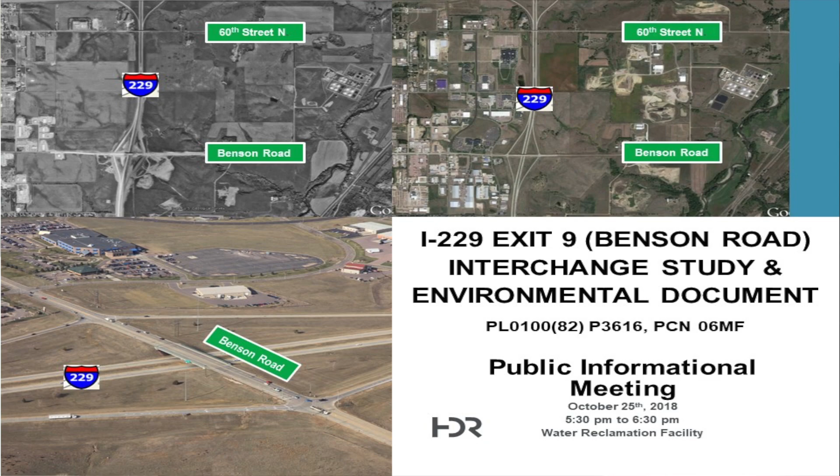Tonight we're going to talk about a project that we kicked off early 2018 where we're doing an interchange study, with hopes of having a document that we turn into federal highway in the near future. And while we're doing that, we're also doing an environmental document. These are kind of the first steps in preparing for construction.

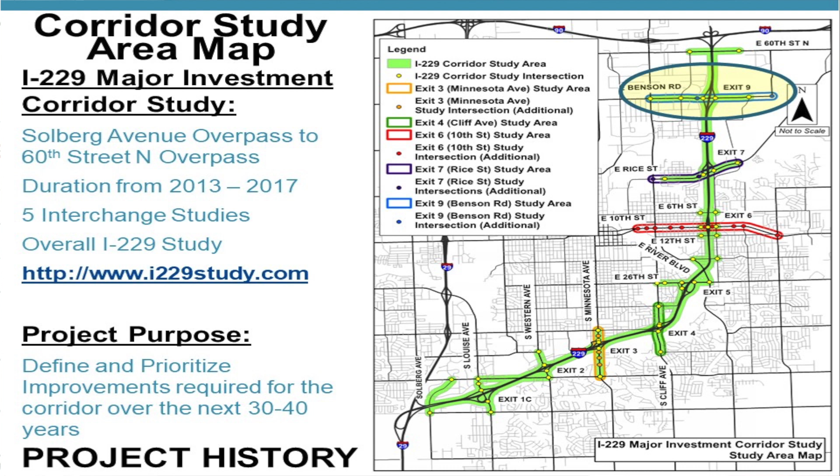We had a lot of different things we were looking at as part of the study. We also looked at different ITS applications, or for most people, that's things like digital signs on the corridor, message boards. We looked at variable speed limits, all the things we might anticipate happening on the interstate corridor 229 over the next 30 to 40 years. That was a very large study. I think we held probably 50 different public involvement events between small group meetings, public meetings, and stakeholder meetings.

Eventually, last year, we summed up the project. We defined the priorities moving forward, and hence this is why the Benson Road project is being worked on now.

For Benson Road specifically, at I-229, the limits of the study go from Cliff Avenue over to Sycamore Avenue, consistent with the corridor study. Now, later in the presentation we'll talk about the actual limits of construction, which will be a little shorter than that. Right now, we're identifying construction from about Lewis, just a hair west of Lewis, over to somewhere between Bahnson or Hall Avenue, depending on what we find out with development.

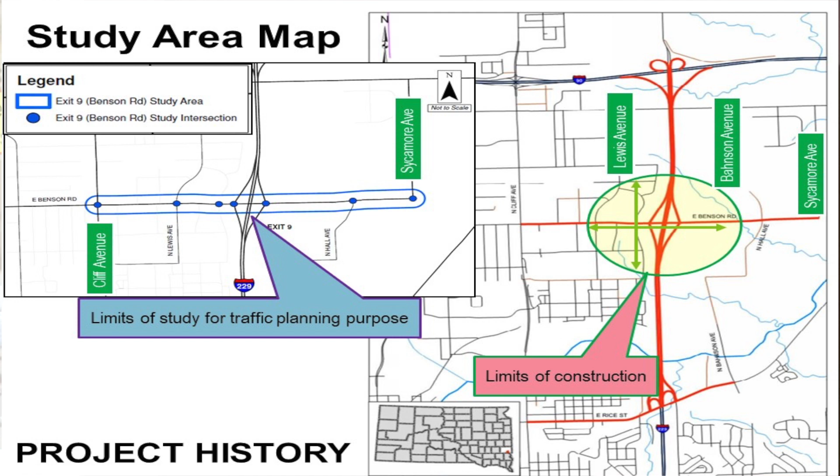Some of the things we learned during the corridor study that are relevant to carry into our current study: as we start at Cliff Avenue, this was a location where our capacity was at level of service D, which is really just a grading system for how traffic works. That's at the higher threshold of where we want to be. If we get any lower than that, into an E or F range, we have to do some capacity improvements.

One thing that kind of resonated from that study was some of the crashes we were experiencing at that intersection. So at some point when we do improvements there, we'll have to look at those crashes again and provide some mitigation strategies.

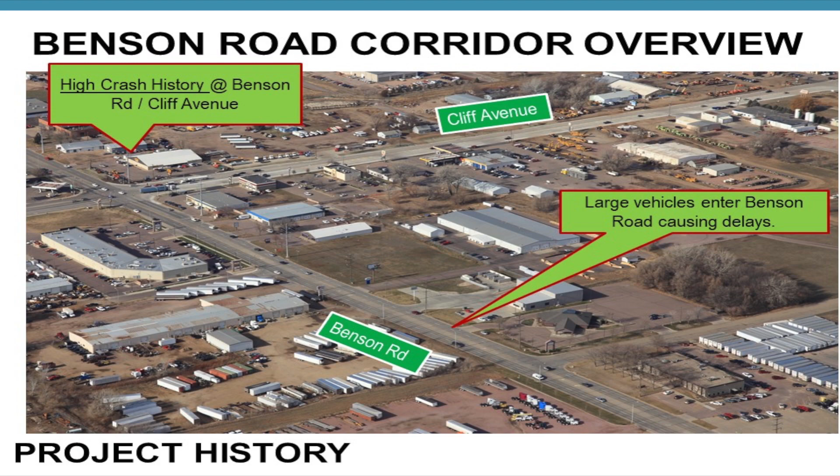A lot of the landowners, and I talked to a few gentlemen here tonight, talked about the larger vehicles on Benson Road. We have a lot of intersections out there that it's hard for trucks to make the turning movements, and they're turning over existing sidewalks. They're also finding it very difficult to even get out onto the corridor. If you're a commuter out here during the PM or AM peak hour, you get these long stretches of continuous traffic, and it's very difficult for a vehicle that takes a little longer to get on and off the corridor.

As we move over into the area between Lewis and Potsdam, Lewis Avenue serves a large employee area. A lot of vehicles come off the interstate going north on Lewis or north on Potsdam in the morning, and they're doing the opposite at night, coming back onto Benson to get onto Interstate 229. So we experience a fairly good amount of congestion at Lewis in the PM hour, more so than the AM hour. Potsdam is a little different.

At Potsdam, that's a location that doesn't have a signal, so in the morning it's an easy right turn to make to get to your area of business. But in the evening, we have about 200 to 300 folks trying to turn left back onto Benson Road to get on Interstate 229. If you drive out here, most of the time traffic is queued up in that outside lane, so there aren't really any gaps. We've got to address what to do with that so we can mitigate any long-term safety and crash problems.

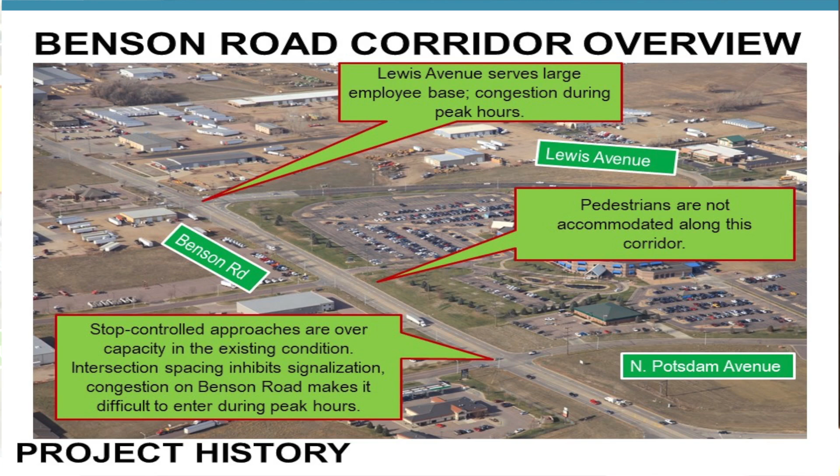One other thing we noticed, commented on during the corridor study, was pedestrians. Over the last 2 years we've implemented some sidewalk out there, but we don't really have a thoroughfare for folks to be walking. The sidewalk is here and there, and in these large employee areas we're seeing more desire for folks to have sidewalk to walk at lunch and do different things. We certainly want to carry that into this study.

At the interchange itself, this is unique. We have land use pretty much built out on the west side of the interchange, but on the east side we have very little land use developed so far. When we look at traffic capacity at the west interchange terminal, we've been watching it closely over the last 10 to 12 years. We haven't implemented a signal system, but we're watching to see when that would need to happen, and the capacity is starting to get right at the limit where we'll have to do something.

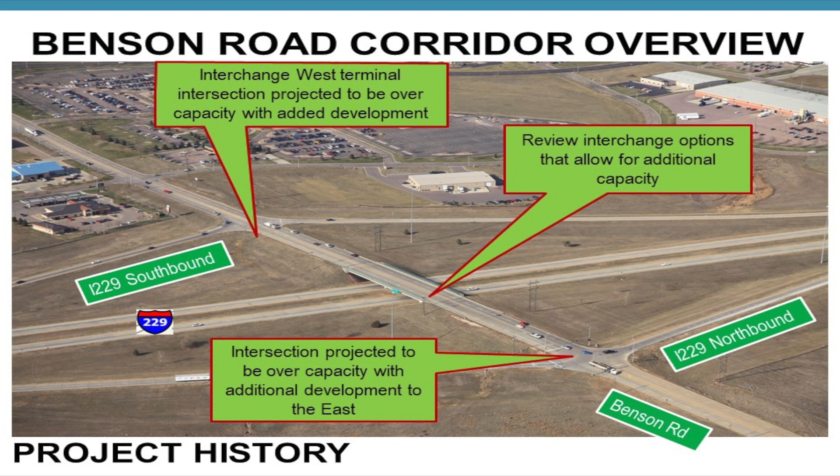At the terminal on the other side, the east terminal, right now we have about 1,600 vehicles turning left in the morning. We're pretty much giving all of the signal time to that movement because we don't really have much through traffic there. Our concern is that as development takes place to the east and we have to allot more time for that, we're going to have a lot more congestion than we already do.

If you've worked in this area a long time, we used to have the interchange ramp as a single lane, and then the DOT made it into a 2-lane ramp. That really helped separate the traffic and get more traffic through here. Now we're looking ahead for that next amount of traffic to come through, and to do that we need to look at different interchange options, which we'll get to later in the presentation.

These are our big drivers when it comes to operations in this area. In the morning, today's count shows 1,610 vehicles taking that left turn, folks going to work. That's a big number. If you look at I-229 at 41st Street, probably one of the other larger interchanges in Sioux Falls, we've seen numbers anywhere from 1,200 to 1,400 in that area. So by far, this interchange sees the largest left-turning volume in the city of Sioux Falls. What we typically look at is what happens in the opposite peak hour of the day, so the blue would represent the PM peak hour.

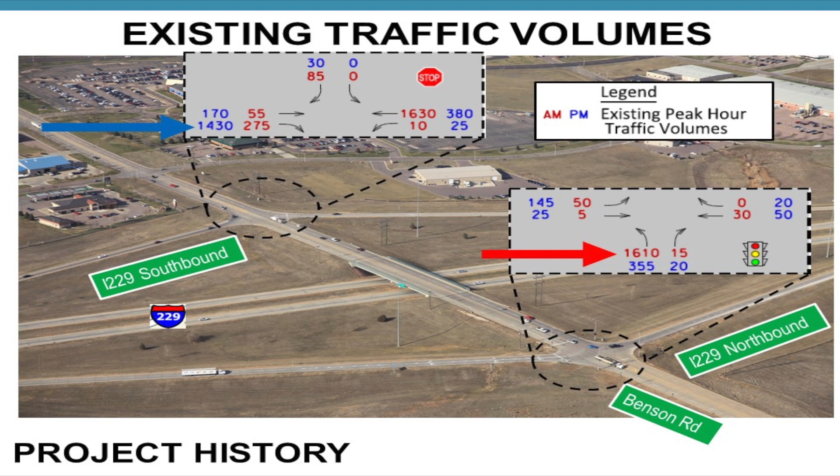We have about 90% of those people we see in the morning coming back trying to get onto I-229 to go back southbound, so those two numbers are very large. A standard ramp in the city of Sioux Falls, probably in the state, is anywhere from 600 to 1,000, maybe 1,200 vehicles. We're seeing a very large volume out here because we have large employers, and we need to service those industries.

As we get to the east side, this is an area with very little development that took place. On the south side, we're starting to see some development closer to Rice Street, but development plans are being looked at and talked about. We've got a lot of undeveloped land that's probably pretty prime for development. So in the not too distant future, we are going to see volumes generated from here, and we need to figure out what to do with them.

Another key component to looking at the east side is really the connection between Benson Road and 60th Street North. Bahnson Avenue is an area they've identified. This road was going to go in a few years ago; some grant funding had fallen through, but it won't be too long, and that roadway will be another conveyance over to Benson Road, sharing traffic volumes between those corridors.

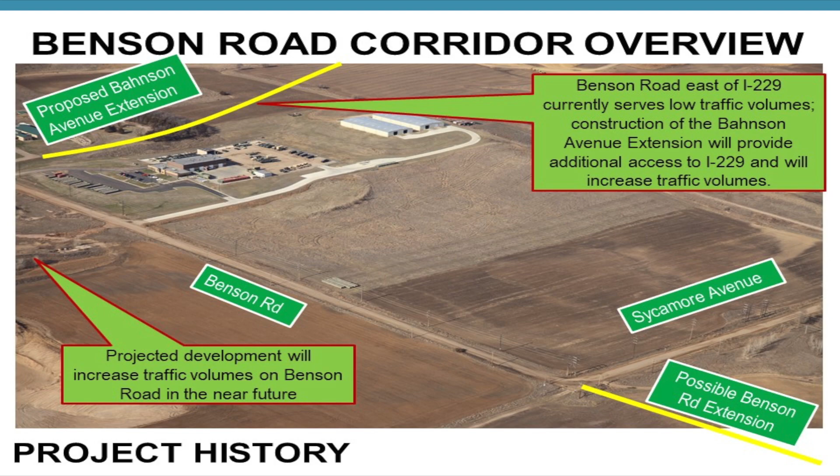Looking down here in the corner, this is even maybe a little further out in the future, the extension of Benson Road. You can look at the extension to serve additional land on the east side of the river, and the potential of Sycamore Avenue to go all the way over to Rice Street. All of these things were considered when we looked at future traffic volumes and what the corridor needed to look like on the east side of I-229.

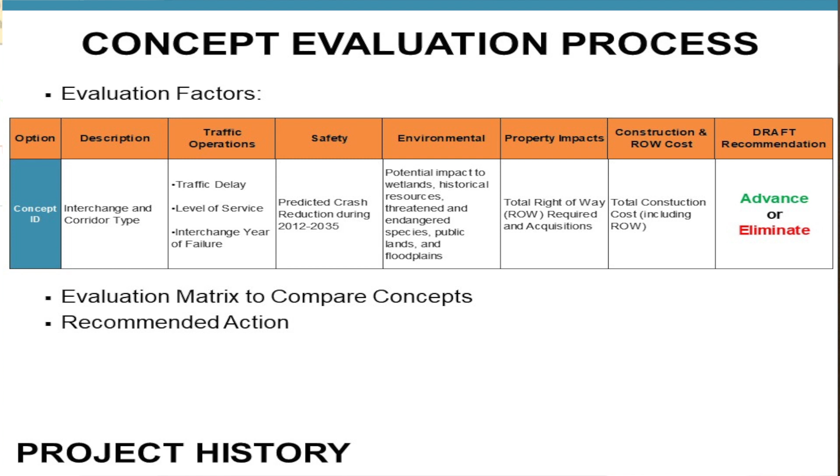All of that was done during the corridor study. We went through a higher level concept evaluation process. We looked at operations, traffic operations, and safety - how does the interchange work now, and if we generated a new option, how would that interchange work in the future? We looked at a high level on environmental impacts, cultural concerns, wetlands, streams, floodplains, and property impacts - does one interchange option need a lot of property from adjacent landowners or developers, or don't we need any?

That really gets into the construction and right-of-way cost. We have options here that range anywhere from probably 20 to 40 million, depending on what we're doing. We're not going to explicitly give you that information and show you which one is more expensive - we really want you to comment on the different options so we can have that takeaway from tonight.

With the corridor study, we generated a variety of options, went through them, and either advanced them for use in the current study we're working on, or eliminated them at that time. There was really no need to go back now and reinvest time into those options - we already screened them out. So we carried 3 options forward in the corridor study.

We'll go through these, and remember our key things: traffic volumes in the morning, 1,600 vehicles wanting to go this direction, coming up to the signal and taking a left. In the evening, we got over 1,400 that want to get back on. So that's kind of the driver in what we were looking at for interchange options.

Benson 1A from the corridor study looked at bringing a dual lane off-ramp off of I-229. Folks that want to go eastbound would follow the ramp up to the intersection and go east. The folks that wanted to go to the west side of the interchange would simply take the loop ramp, a 2-lane loop ramp. When they come up to Benson Road, they would not go through a signal - this would be a free flow movement. All of those vehicles that have to stop at the signal now under this option would not have to stop, which would certainly be beneficial. A lot of folks indicated that they really like not having to sit there and go through a signal.

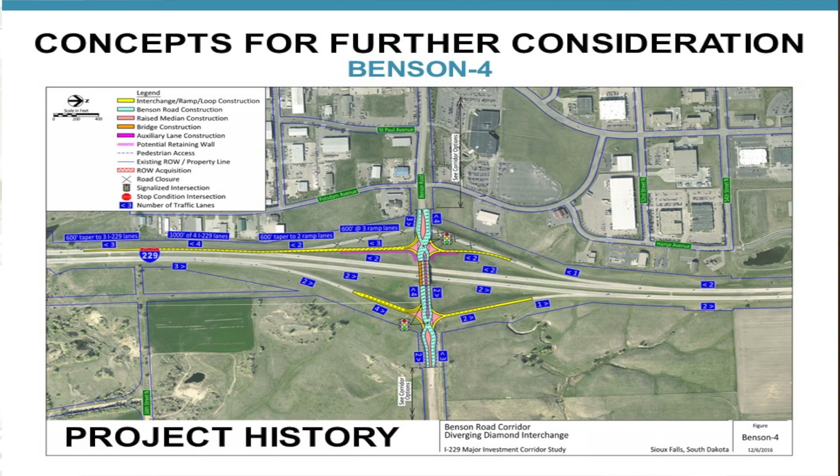We have traffic running east, traffic running west, folks coming out here that want to take a left and go north, and folks coming onto the ramp that want to take a left. Everybody has their own signal, they get a left turn arrow, and we've got to give all those people a certain amount of time. We want to take all those movements out if we can to really allow that ramp traffic to enter much more efficiently. I have some videos that will go over this, to make it clearer in your head what it looks like.

For the west side of Benson Road, we spent a lot of time on this in the corridor study. When we look at those future volumes, we look like we need a 6-lane roadway. Right now we just have 2 lanes in each direction. With a center turn lane, we would go to 3 lanes in each direction to manage that flow. Considering we're looking to the year 2045, that's more traffic than we're seeing out there today. So this is kind of a unique design - we'd have 4 lanes across the bridge.

We'd allow for 1 lane to exit at Potsdam, 1 would exit at Lewis, and then we'd carry 2 lanes over to Cliff Avenue. This design really sets up well for the type of traffic we're seeing at the interchange.

As we come down in the PM hour, we have to make some striping improvements to Lewis Avenue. Right now we're lucky there's enough width out there to lengthen those dual left turn lanes. We're going to have to make some improvements on Lewis on the south end. We'll actually start the 3rd lane a little bit on the west side of Lewis, and then we'll have 3 lanes all the way over to the interstate.

So these are all the things. One thing to note, if you're a landowner out in this area, when we go to 6 lanes, we go with an raised median section as an access management treatment. It gets awful wide for vehicles to turn across all of those lanes.

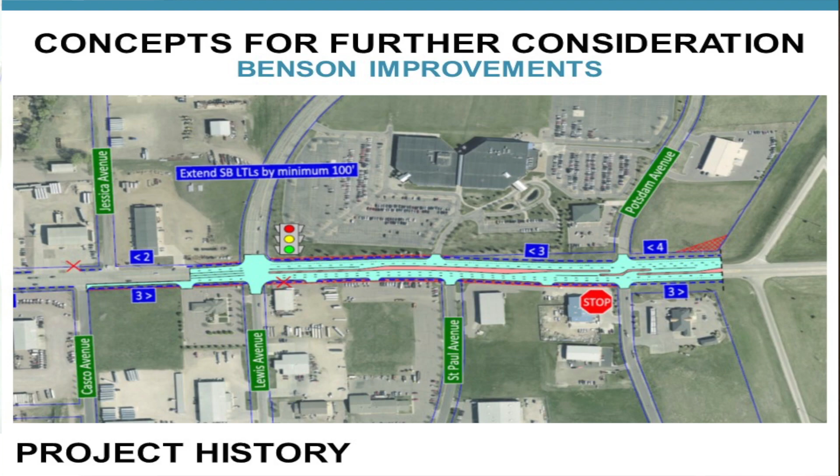The other driveways along here, we don't have the spacing to accommodate the same, so some of these driveways will be limited to right in, right out, and they'll use some of their side driveways to get to the locations where they have full access.

So we finished the corridor study. Benson Road was determined to be a high priority interchange because we knew with the development coming to the east side, if it becomes something great, we're going to have some major interchange problems. The last thing we want to do is back up traffic onto the main line.

We have a few locations, 10th Street, 26th Street, where you see that on a daily basis, traffic backed up, and those are where we can have our severe problems. So 26th Street, due to that and some other capacity issues, that project was fast-tracked, and it'll actually start construction next year in 2019. We're making other improvements at some locations to buy us some time.

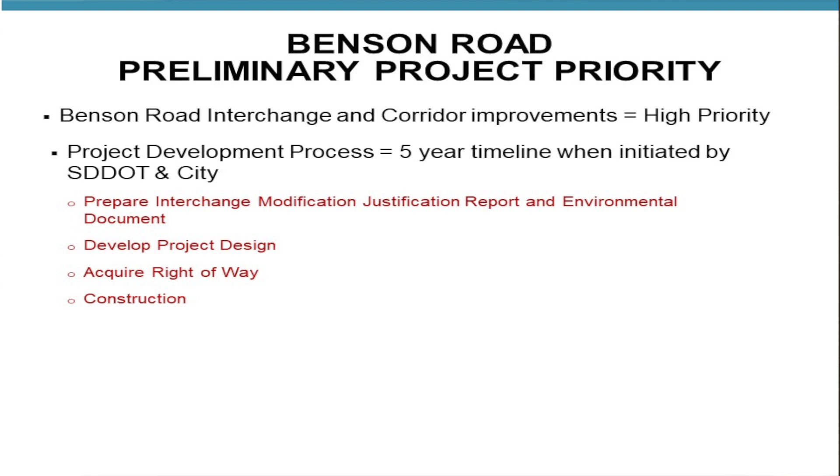From that study, this was a high priority location. We identified the process of generating the interchange justification report, doing the environmental process, going through design, getting all the right-of-way needed, and commencing construction - about a 5-year process. So here we are. We got through the study, the city and the DOT jointly got together, and we're preparing those documents and getting ready for construction in 2023. And so the environmental process...

Anytime we look at completing a project like this, our federal friends require us to go through this process of making sure we're vetting out all the options and selecting the right one. It's really a good process. I'm going to show you where we're at now. There are several stages to it.

The scoping component is where you're looking at items that need to be addressed. Really, the 229 corridor study helped us do that - that was kind of our scoping component. With this study, we generated a purpose and need, which we'll go through next. What do we actually need to do?

We need to develop alternatives that satisfy that purpose and need. We need to do an evaluation, making sure we have a matrix comparing all the options and identifying the right one. That's where we're at now - we've generated the options and we're going through the matrices to identify what that looks like. Then at our second public meeting, we'll go through the selection of the preferred alternative, going through the matrix and what the numbers shook out to be.

We'll bring that back to you. At that point, we'll be ready to submit a draft document on the environmental review and move through that process. This is our first meeting introducing that to you, and we're happy to do that. But it's a consensus building process.

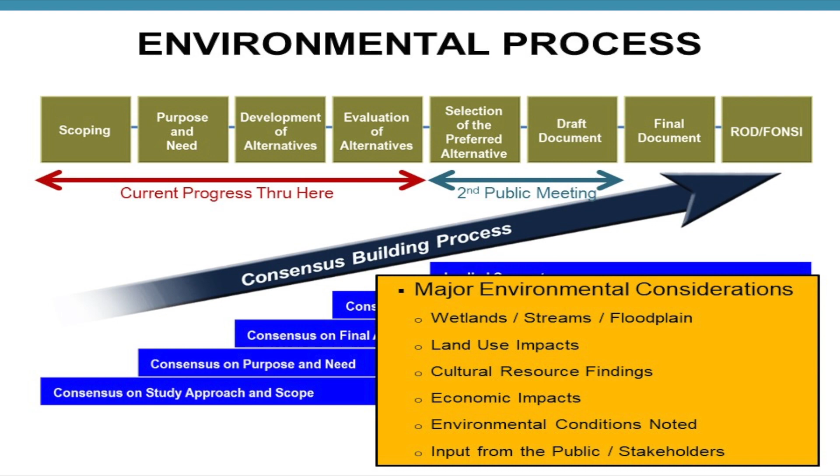Our project purpose and need - sometimes we have a lot of different things that we need to overcome. With this interchange, our main thing to do is improve the traffic operations, but at the same time enhance the mobility of non-automobile traffic. As I noted, we didn't have sidewalks throughout the corridor. That's something we want to add with the future project. Pedestrians, we want to make sure it's set up for transit.

At some point in time, especially with the employment areas out here, there's certainly the potential for transit to be a bigger player in moving folks from their home to their jobs. Then bikes - how do we want to get bikes in this area? Do we need separated lanes? Those are the type of things we looked at, a lot with the corridor study as well.

So that's kind of our project purpose. Now our project need is simply to solve the capacity concerns that we have under existing conditions and then in 2045, and then the lack of accessibility for non-automobile transportation. If you look at the bottom graphic, these are level of service values, as I said earlier. If we have level of service A, B, or C, that's good.

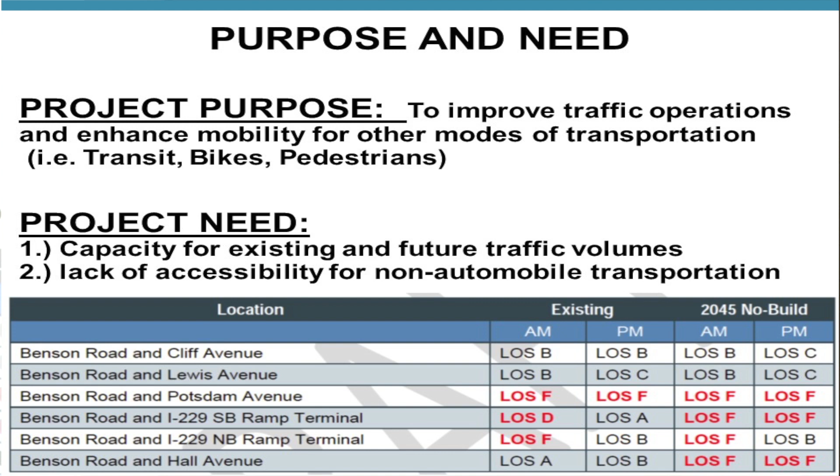It's just like your grading system in school - that's positive. If it's D, E, or F, that means we're probably at the point we need to make some improvements. You can see 3 out of the 6 intersections we evaluated in existing conditions already fall below our level of service requirements. When we look out to 2045, those conditions get worse - we add another intersection to that. So we need to figure out what will make this corridor work for the foreseeable future.

Typically we will look out 30 to 35 years. That's kind of the length of time that concrete and asphalt and those things last. So once we put it down, we want it to manage the traffic that we have until we need to do replacement of that surfacing.

This is maybe a little harder to see for you folks. Some of the environmental considerations - you can see right at the east end of our corridor, this is Sycamore Avenue. This is the floodplain and floodway for the Big Sioux River. We have a water quality BMP that exists right along our corridor. These blue lines are intermittent streams, so if we impact those, we have to do mitigation for them. We've got wetlands that exist inside our boundaries.

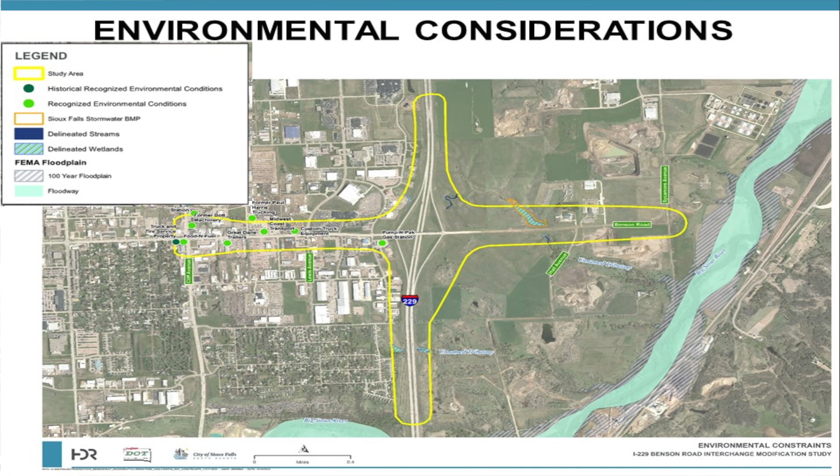As we went through and did some of our environmental studies, we have a lot of areas out here that have petroleum on their site. This doesn't necessarily mean there's an issue, but it shows up as a location where we need to make sure that if we're on their land doing work, we determine if we have to do any mitigation for petroleum. There's all these different things we have to do along with socioeconomic impacts, threatened and endangered species. All of these things we'll be looking at with this study, and we've done those corresponding studies and determined.

So really what we want to do to minimize those environmental considerations is shrink that footprint. If we're coming up with an interchange design that fits inside that right-of-way, that's probably our best strategy in minimizing environmental concerns. But to do that, we need to make sure we also meet our purpose and need of managing and helping that traffic capacity.

Those are what's on the boards out in the entryway, and really that's what we want to take comments on. After we get done with the presentation, we'll open up and take some general questions as well.

Okay, so you don't need to read all of this. I know we're online tonight. This will also go on the website, and so we do have some text shown here simply for people to go through, if they are not at the meeting, be able to read through if they're not here listening to me. So I just wanted to point out a few things.

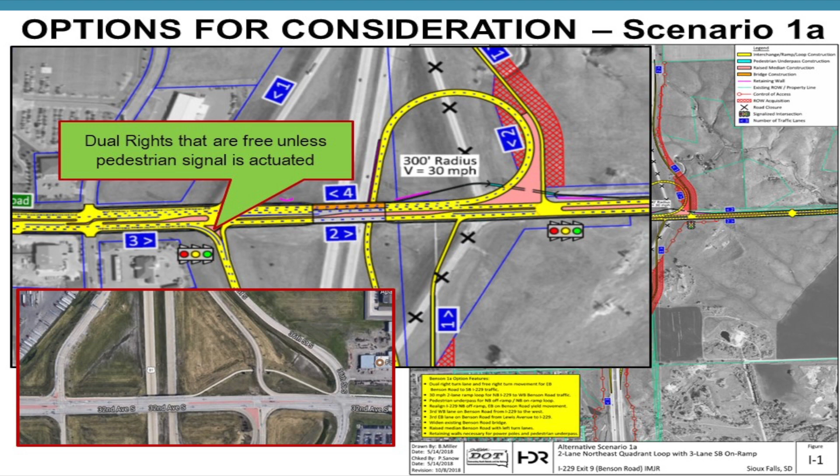In regards to traffic capacity, this interchange works at level of service B. In the year 2045, this free flow movement is something that's supported by the folks that are out there, so they don't have to stop at a traffic signal. And you'll see up and down the corridor we do have access management treatments, so that's very good.

I'm just going to blow up the area and point out those few things. One other item we are addressing with this is pedestrian or bike connectivity right in this location, just due to this long crossing - if folks would have to cross an intersection with a free flow movement, if you've ever tried to do that, that gets very difficult. So we're implementing what we call a pedestrian underpass, basically a box culvert large enough to handle folks walking through it or riding their bike through it.

The bottom graphic here in the corner, that's 32nd Avenue South in Fargo, North Dakota. Very similar type of interchange that we have - we have a loop ramp. This is more of a standard diamond, but this route right here is an underpass, and it goes right back to the bridge, a similar configuration. They work really well, separating that pedestrian traffic from our roadway traffic.

Scenario 1B - I'm just going to pop this up. Down in this area here, this is maybe a more conventional design. Instead of bringing that ramp up here where it's a direct right turn movement, we bring it up, so that ramp is governed by the signal that's here.

We had a lot of discussion with our study advisory team in regards to this option. Some liked it because if somebody got on this ramp, it did give them the option of still making that left turn if they didn't realize they were supposed to go under and use the loop ramp.

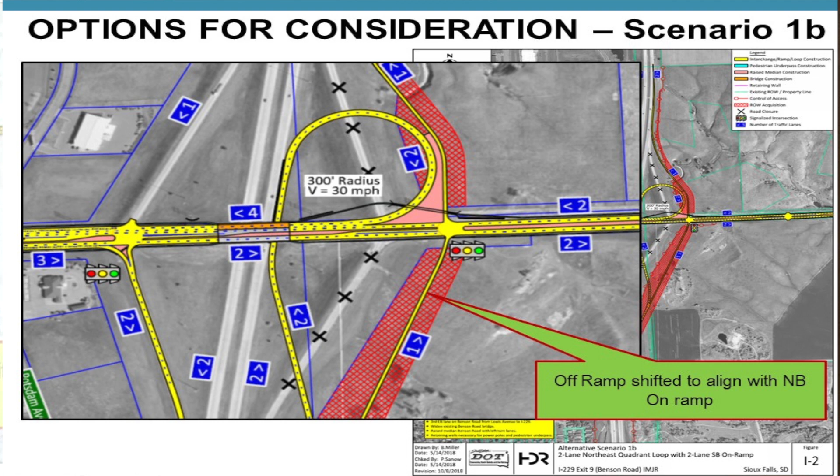If you remember, we had a very similar configuration at 229 and Louise here in town. That was built in the mid-90s, I think. And what would happen at that location is, due to the length of the loop ramp, we had a lot of people that would use the signal instead. So we kind of split that and maybe didn't maximize the importance of the loop ramp, and they took that ability for them to go away. So if this was the preferred option, we'd probably try to get a larger radius and really discourage that movement from taking place if we could.

But certainly still an option, but if we did that, we would need additional right-of-way compared to option 1A. 1C is a little different type of design.

If you look at the boards, we call it a CD road type of design. In some cities you drive through, you may get off at an interchange and drive on a 2-lane road. They're called collector-distributor roads, and they're really close to the main line pavement, maybe separated by a barrier. So this is another option.

We would actually do a CD road that would come off very shortly after the Big Sioux River Bridge. We'd add 2 lanes along I-229, with a barrier starting down in this area that would stay very tight to the main line. The loop ramp would stay the same.

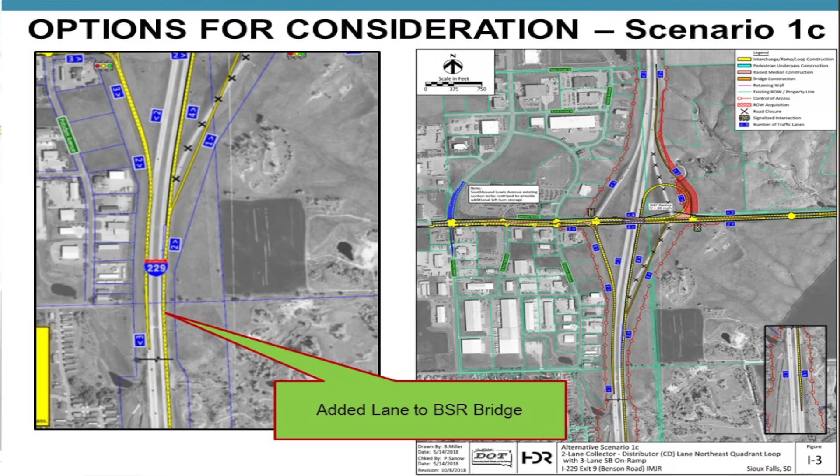But if we did that, our eastbound ramp for those folks to go eastbound would be primarily where it is now. So this option allows us not to get any right-of-way. That's a very good option, although in regards to construction, we have a lot more pavement we need to put down, but still a very good option.

It certainly reduces the right-of-way needs. We don't, in any of the loop options, really reduce the right-of-way needs up in that corner. That's a concern for us because we get into this intermittent stream and some right-of-way impacts and wetland impacts.

This is just a rendered view. If you go to the website, this would be on there. If you look at the existing interchange, this would be where the existing ramp is, and this is where the existing off-ramp, on-ramp. This would be our dual ramp rendered over the existing aerial.

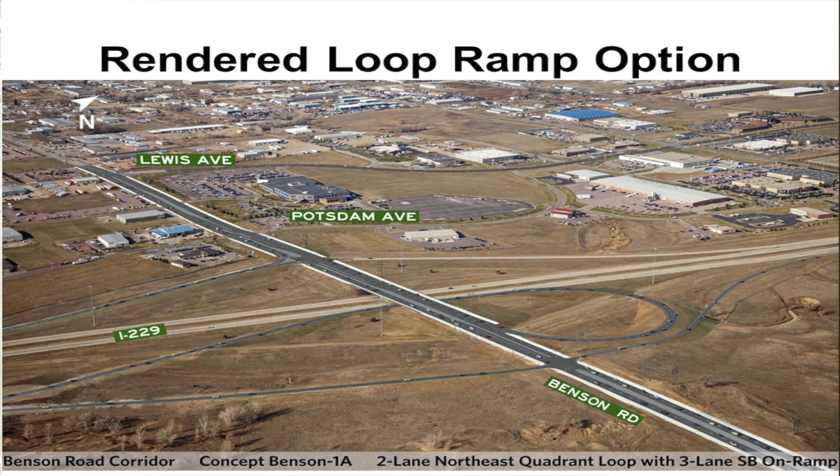So that gives you an idea of what it may look like if we went to a loop ramp configuration. Kind of neat, but you do see how far we get out with this other ramp. We're really starting to fill in this area of the stream, and that's a concern.

As we get into 1D and 1E, this is a different version of a loop ramp. We'd actually call this more of a folded diamond type of interchange. We have some concerns with it in regards to our purpose and need, though.

So you kind of see the strategies as we name the scenarios. Though we left them all as 1, we made them A through E, corresponding to the original ones of the corridor study that were 1 as well, just so people can follow them between the two studies.

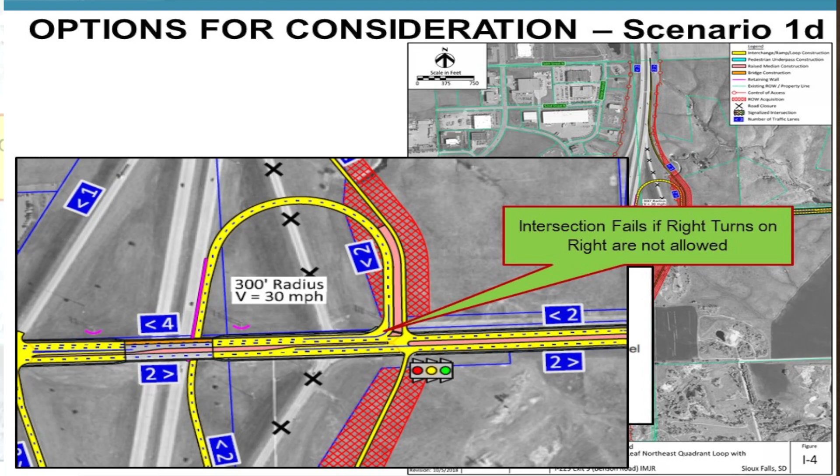When it comes to this type of interchange, one of our goals—if you've seen on the other options, we had bridge widening up to 4 lanes—was to figure out how we could minimize the number of lanes that would cross the bridge so we wouldn't have to widen it that much. So we brought this dual lane off-ramp into the signal, and the idea is the signal would allow them to go across. If that was the case, we would only need 3 lanes instead of 4 to cross the bridge for that westbound direction.

If you've been through the intersection of 229 and Louise, that's an interchange that has dual rights and dual lefts. They've tried a few different things at that location, letting folks do a right turn on red. Do you guys know what those are? You can take a right turn even if there's a red light.

There's concerns around the different states about how that works if you have 2 right turn lanes, because this guy in the outside lane may block the inside lane. If he's lagging, you can run into rear end collisions, those type of things.

As a study team, we just didn't feel we had enough support or enough information to really be okay with moving forward with this option. So when we ran the capacity assessment, we ran it not allowing right turns on red. And if you can imagine, at any given signal, right turns on red, there's a lot of people that do that, so we lose a lot of traffic.

Not all of them have to run through the signal, but when we make everybody run through this signal, especially over 1,600 vehicles, we don't meet our capacity needs. So if we don't use that right turn on red, our intersection does not meet our purpose and need, and we're not going to be able to advance that one forward.

This was the same one. We generated these options really before we knew all of the operation assessment, but this would be the same way, same option, same concerns here in that quadrant.

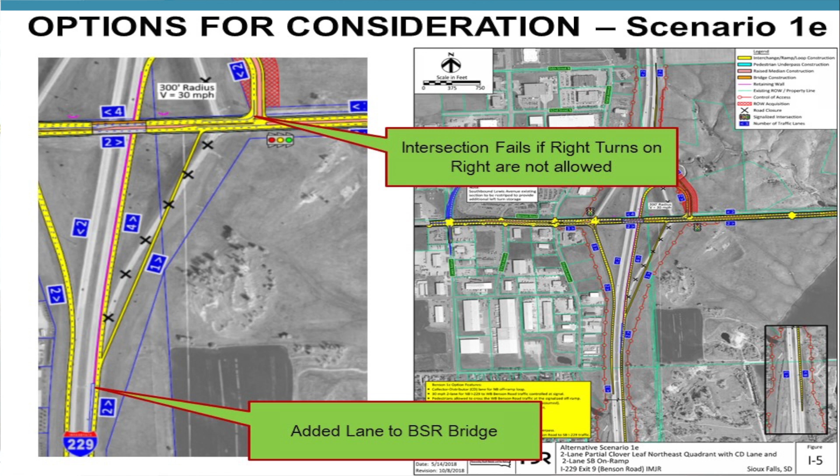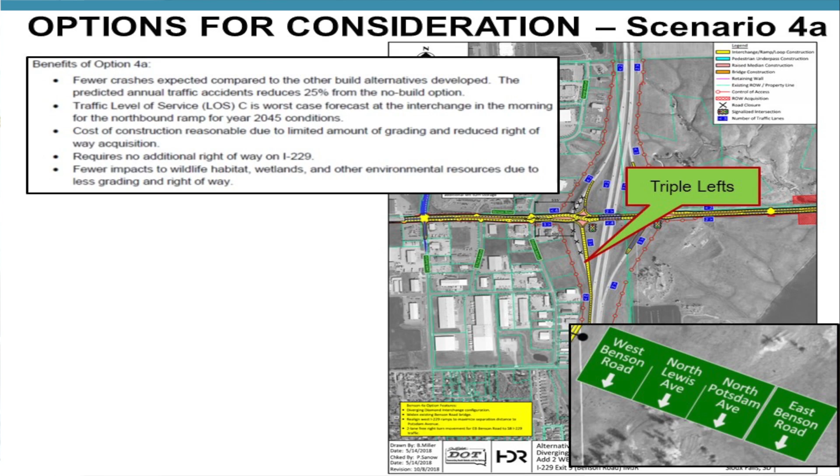When we look at predictive crashes, that's one of the things we have to do with our studies now. We look into the future and say, how would this interchange work in regards to crashes? These interchanges have proven to be very safe, with a lot of reduction in crashes compared to existing diamond interchanges. The level of service at the interchange, level of service C, really manages things well. The cost is very good, requires no right-of-way, and as I mentioned, fewer environmental concerns.

This is really a blown up view. You can kind of see the triple left configuration that exists in this location. One thing we believe would really help is the signing configuration, so we'd have an overhead sign. If you wanted to go to Potsdam Avenue, for example, right in this location, you would use the right left turn lane. If you wanted to go to Lewis, you'd use the center. And if you just wanted to go west on Benson Road, you'd use the outside left turn lane.

When we look at that total volume, we have about 300 to 400 people that take that right at Potsdam, and about 700 to 800 that take a right at Lewis. So when you look at the total 1,600, about 1,000 want to take a right in that first half mile, and about 600 to 700 want to go through. So that does a really good job of separating that traffic out, letting them know where they need to go along the corridor. That sign would be somewhere down here, so as you enter in those turn lanes, you know where to go.

I did throw in another version of a diverging diamond interchange. This one is right outside of Charlotte, North Carolina.

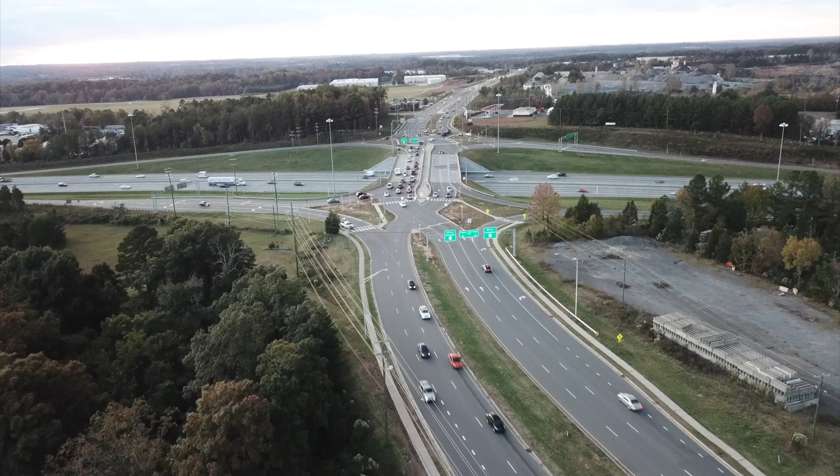I'm just going to run the video here so you can see how they operate. As you see folks coming up through the stop bar, these folks have a free flow movement going right here because these folks are stopped. All of the ramp traffic, once they go through either this signal or this signal, have that free flow movement. That's very important, it makes things very efficient. You can see these guys are on their cell phone, these guys are stopped when they should actually be moving at that point, so I kind of laughed at that. But this is just a general overview of a diverging diamond.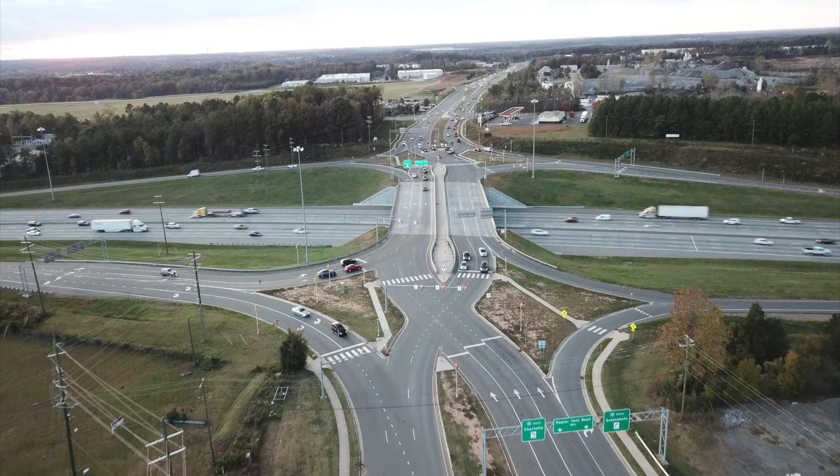There are a lot of different configurations—over, under, number of lanes—determined by the actual level of traffic that you have, but how they operate is very similar.

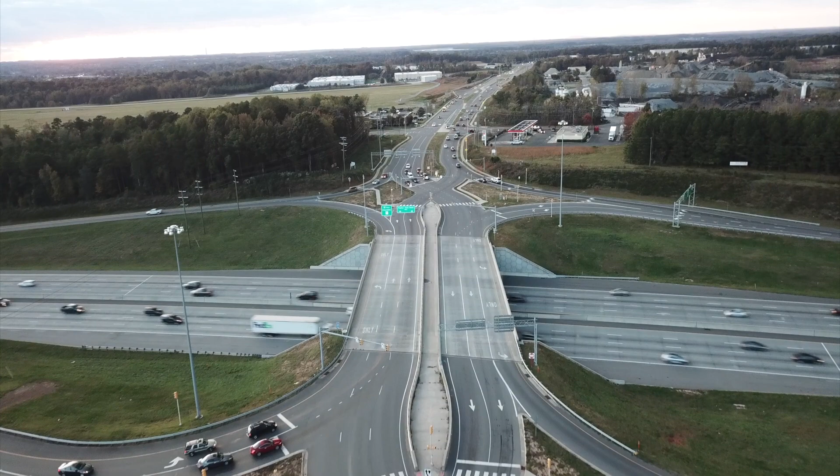So that was scenario one, or I'm going to go back—I forgot to mention one thing on that. When we look at this option here, right now we have currently a 5-lane wide bridge. So with these turning movements here, the added traffic that we have in the future going westbound on Benson Road, we have 4 lanes that are here.

So we have to widen that existing bridge two lanes. When we were talking to the DOT bridge engineers, the folks that designed that structure, they're a little concerned because the way that bridge was designed, it's going to be harder, maybe a little more expensive just to widen out.

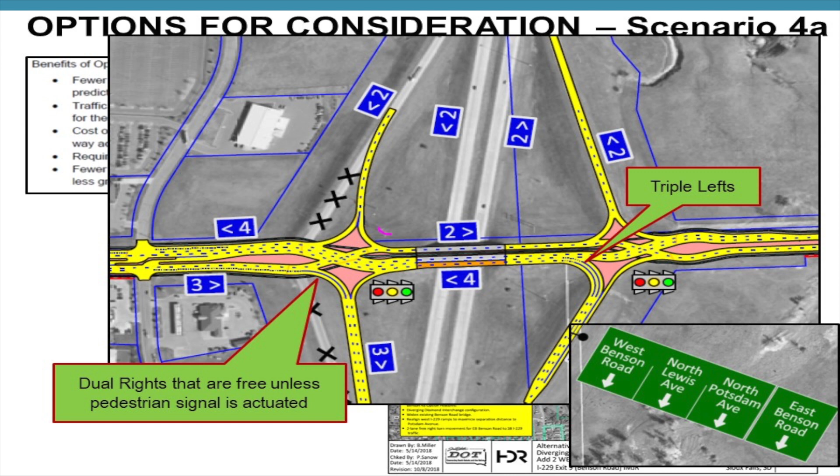So when we looked at 4B, one of the other options instead of widening this existing bridge, they actually thought it might be cheaper if we just built another bridge right next to it. This is just another option, another caveat. It really changes things - instead of widening to the south, we widen to the north.

And so we have to pop up our roadway over here. We have quite a bit of right-of-way through here, so it doesn't really hurt too many things in regards to right-of-way. But it works really well.

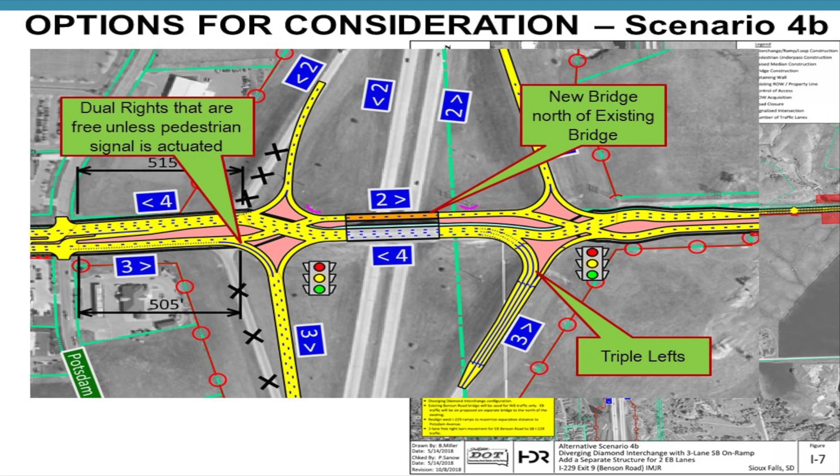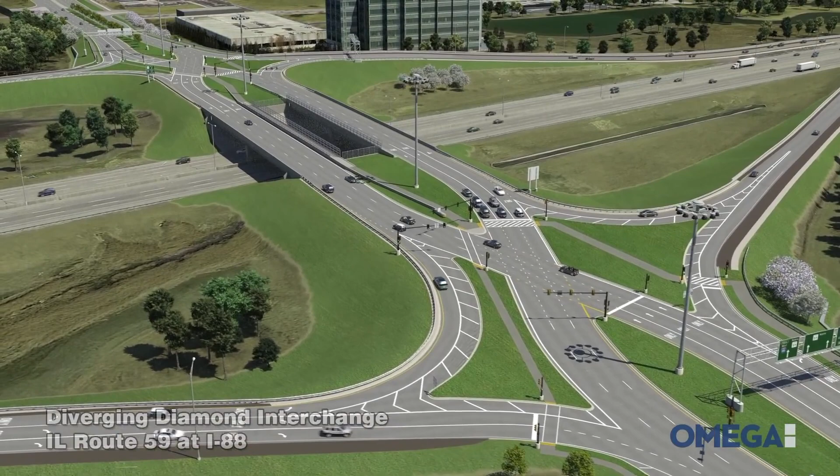So I brought another animation. This is a DDI that has separated structures, just so you could see what those look like. And right there, if you go out to the current bridge now, we have sidewalk that exists on this side, sidewalk that exists on this side. It looked really similar to how it does out there today.

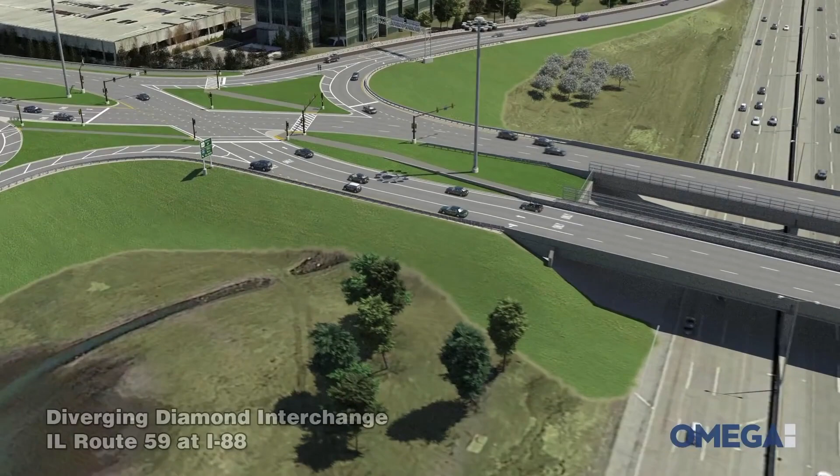So this might be a very good option. The nice thing I like about it is building that bridge off to the north side gives us better availability to keep traffic on the existing bridge, which may simplify a few things. As we move forward, we certainly want to take a stronger look at these two options because there's a lot of very good things about them.

This presentation will be on our website, so if you guys want to go back and click through and watch the animations. If you look up DDIs on Google, they're all over - the number of DDIs across the United States now is quite a lot, so you have many examples out there. I really kind of enjoy looking at the different configurations. This is just an example of what it would look like with separated structures.

Again, this is just a rendered view of a diverging diamond. As you can see, the existing ramps come up. As you're on the interchange coming up to the Benson Road crossroad, you're not really going to see a whole lot. So if you're concerned that a diverging diamond may be difficult to drive through or confusing, all of these movements are directional. When you look ahead of you, you have signing, a barrier, and curb. They're really pretty user-friendly to drive through.

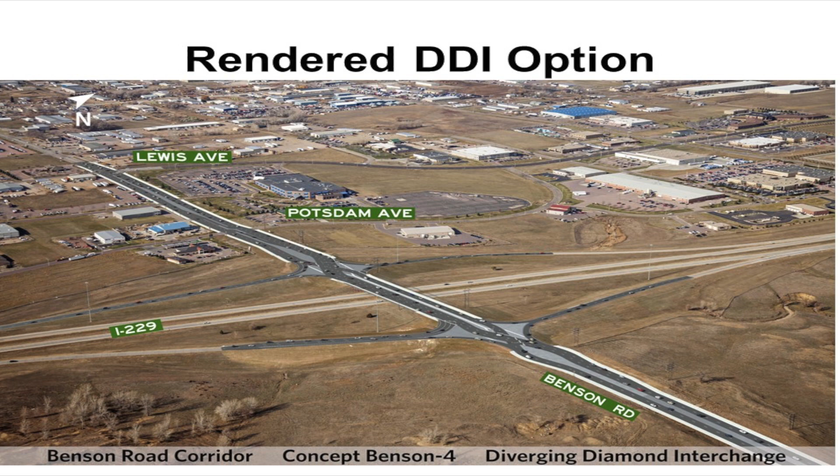Last week I was coming through Wyoming on a quick hunting trip, driving with three other guys who had never been through a diverging diamond interchange. We were in Cheyenne, Wyoming, and drove through one. I never said anything until we drove through it - we drove up to it and they all kind of looked like, 'What is this thing?' They went through it and didn't really know why it was done that way, but had no problems driving through it. I told them afterwards what it was and why it was designed that way, and they understood. It's not really something too difficult to learn how to drive through, and they found it to be certainly very safe.

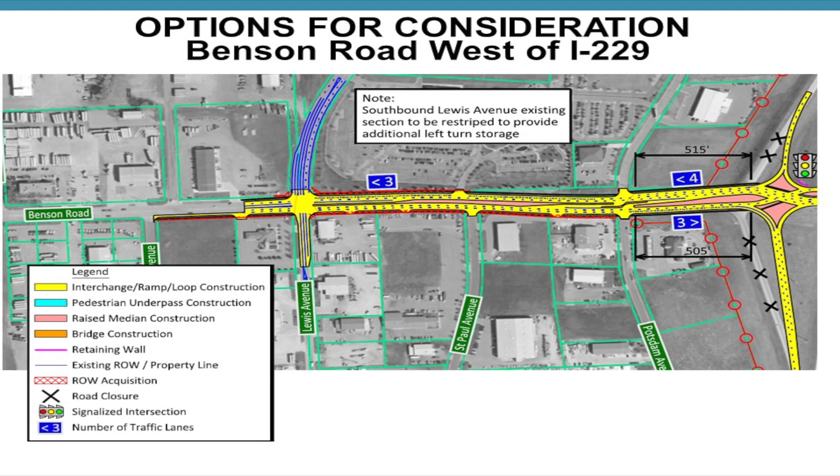As we get to the west side of the corridor, nothing really changed from the corridor study into this. We refined the design based on some utilities and those types of things. We're still looking at the 3/4 movement at Potsdam, and the intersection at Lewis would be expanded.

Then as we get to the east side, as we mentioned in the beginning, we don't really know what the limits of construction would be - whether they'd go through Bahnson and tie back in, or go all the way through Hall under this first design. It'll really depend on what type of development we see in this area as we're going through design, or at least what the developers are indicating could take place.

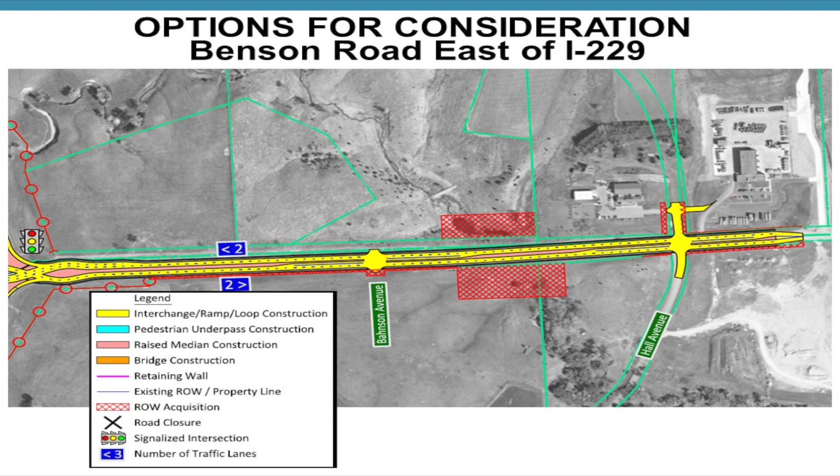But based on the traffic we're seeing in that area, about 15,000 vehicles per day generated, we do need to go to the 4-lane configuration. Since we don't have that land use yet, this is a prime location to implement access management treatments and make sure we can preserve the capacity on that roadway. So this is the evaluation matrix that we generated for the project.

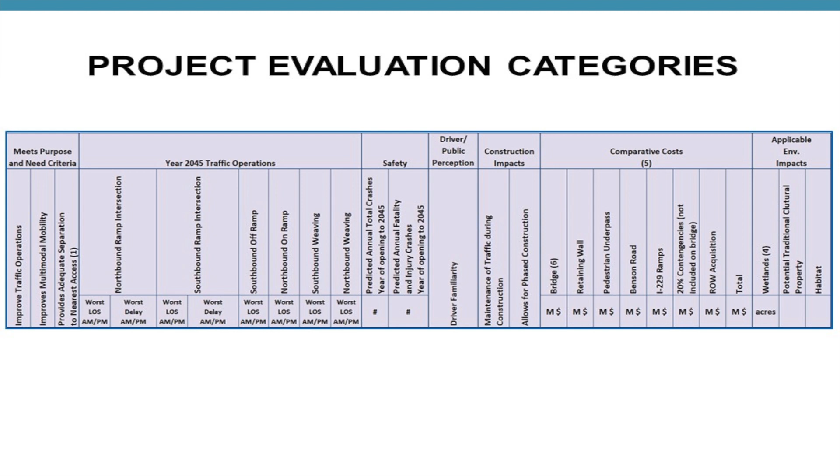On the first three really talks about the items in regards to purpose and need. We have 2045 traffic operations, and this goes from the intersections to the ramps to the main line, making sure that we have good operations along our interstate corridor, along our crossroad, safety, how are things going to work in the future in regards to crashes, and what type of crashes will we have. Will they result in fatalities? Those are something that are really important to us. We want to make sure that we're mitigating those if at all possible.

Driver familiarity, certainly as I've been in Sioux Falls doing this work, we've implemented several different types of interchanges. We had single point interchanges that we designed 10 to 15 years ago. Now we're transitioning to diverging diamonds when they make sense. We have loop ramp configurations already that are here. And so we try to gauge and get comments from folks like you to determine if it's going to be difficult, or if you feel it's going to be difficult.

How do the options handle construction? Can we still get traffic through there? How concerning is that to the businesses or the folks that need to get through there? Comparative costs, certainly we look at costs. It isn't the overall factor. We can have an option that's more expensive and still be the right option, but we do look at costs. And then any of the applicable environmental impacts, that'll be part of our matrices, and we'll show you that at our next meeting all filled out and let you know what the final findings were.

So next steps today, we're holding our initial public meeting to introduce the environmental study and indicate where we're at in the process. Very shortly, we'll be submitting our first document, which will be our interchange modification report for review. We want to do that here after our public meeting. Our second public meeting isn't going to be too far down the road. So in February or March, we'd like to come back, present to you our preferred option, go through the matrices and gain feedback from you, hopefully get some consensus that the option we've chosen is the right one.